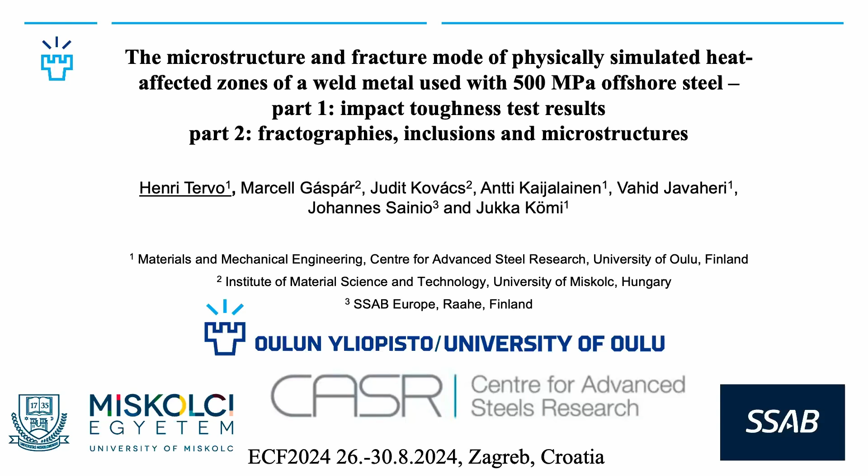So let's go. First, maybe there are some people who don't know where Oulu and our university are, so I would like to tell some basics. We have 8 different faculties. There are more than 13,000 students and almost 4,000 staff, a lot of alumni. It is one of the biggest universities in Finland. And we are located here in northern Finland. If you like flying, it doesn't take many hours to fly from anywhere in Europe. Currently, we have direct flights to Helsinki and to München, Germany. Or if you like slow traveling like me, then it takes longer.

Then our unit, Materials and Mechanical Engineering, is part of a steel research community called the Center for Advanced Steel Research, abbreviated as CASR. And in CASR, there are other units from our own university, but also from other Finnish universities. And altogether, this community is the most important unit in Finland for steel research and steel education.

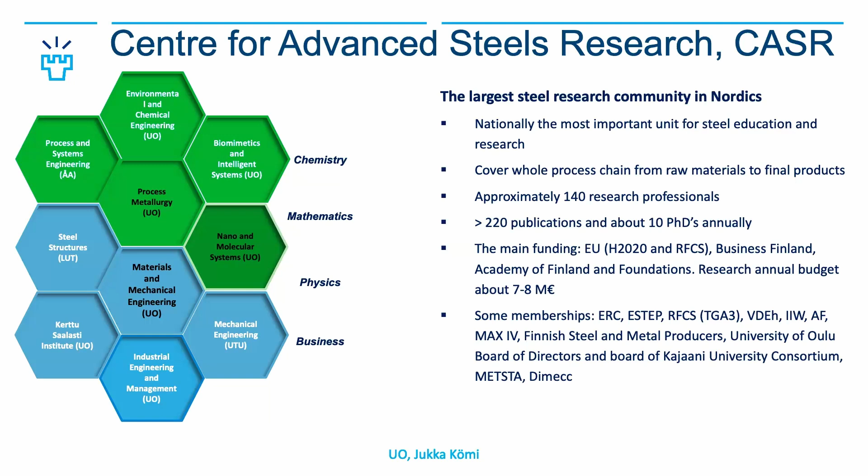Then we move on to today's topic. So the materials are high-strength offshore steels. They are developed for demanding conditions where both high strength and toughness are needed. And typical applications are offshore oil drilling platforms, wind power mills, or ships, for example.

And these base materials are engineered to have very good strength and toughness, but the weakest locations are generally the welded joints. That is because the thermal cycles caused by the welding alter the original microstructure, and that way also weaken the mechanical properties. And welding thick sections may require multiple welding passes. Then the thermal cycles affect not only the base material, but also the earlier welded filler material sections.

And there is quite a lot of research about the effect of heat-affected zones on base material, but not so much research about the effect on filler material. So that's why in this study we decided to study that.

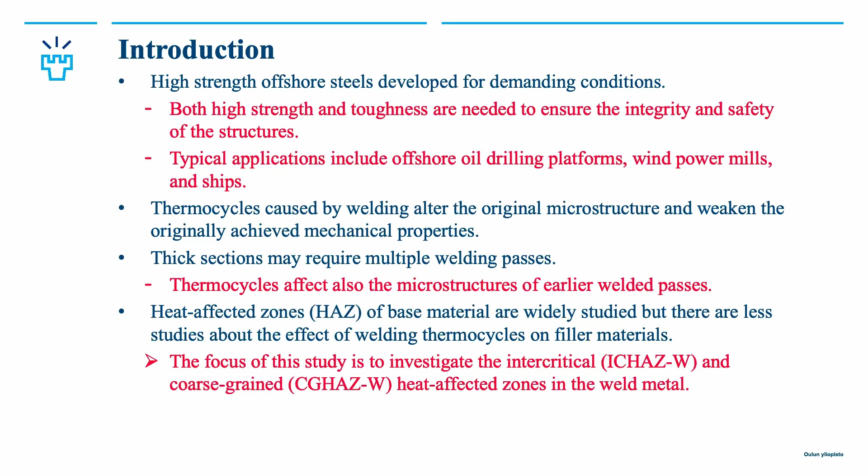And shortly about the materials, they were 16 millimeter thick 500 megapascal offshore steels. They were welded by the single pass submerged arc welding method, which is generally used with this type of steel. And the filler material was ESAB's filler material. Here you can see the chemical composition of both base material and filler material, and also the AC1 and AC3 temperatures calculated by JMatPro based on these chemical compositions.

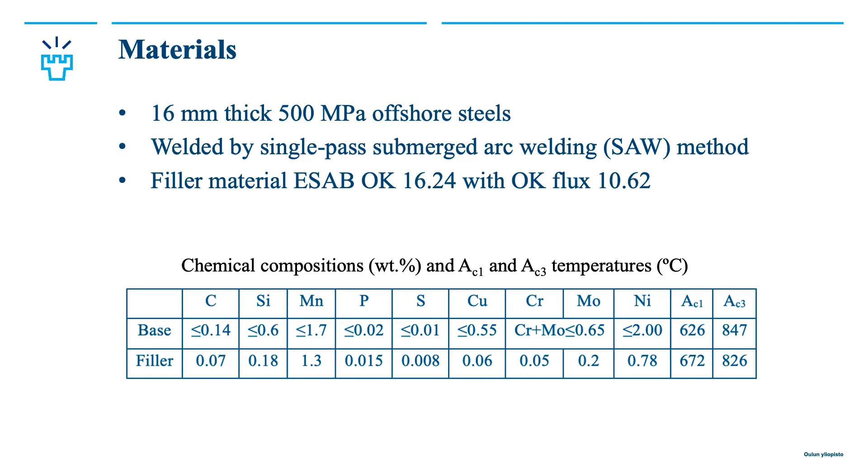And methods. On this single pass weld, we simulated heat affected zones by Gleeble, and then we measured impact toughness by instrumented Charpy V-notch test. Hardness measurements were done also, and then we did microstructural characterization, fractography studies and inclusion scans by FESEM. And for inclusion classification, we used our own Karakterizer tool that was developed by my colleagues at the University of Oulu.

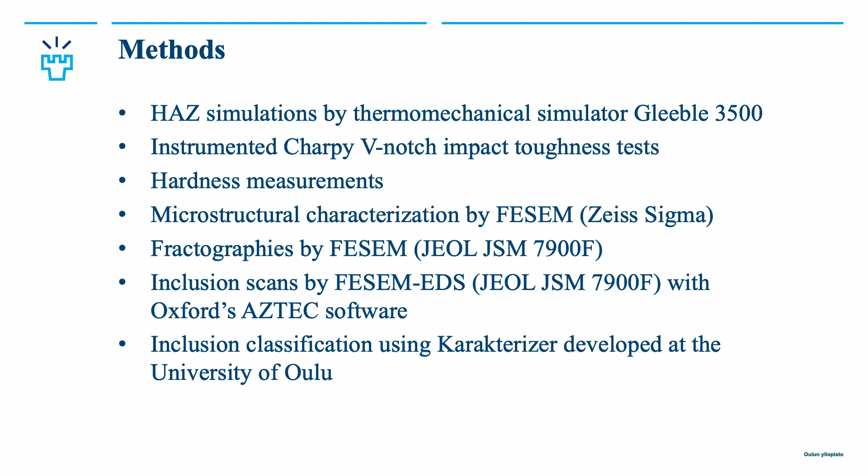And for the thermal cycles that were simulated, we had two different heat affected zones: coarse-grained heat affected zone and intercritical heat affected zone. The peak temperature here was 1350, which means that the steel is fully austenitized at this temperature. While in the intercritical heat affected zone, the peak temperature was 815, which is between AC1 and AC3 temperatures, so it is partly austenitized. And we used three different cooling times, which represent the typical cooling times used in welding this type of steel.

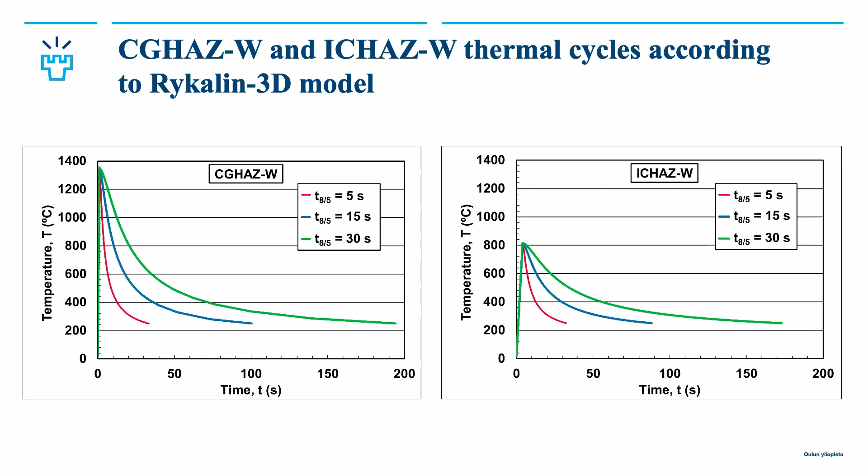Then about the impact toughness results. The original weld impact toughness is here, and you can see that in the coarse-grained heat affected zone there is not much variation. It is a bit less, and with the shortest cooling time there is a lower impact toughness than with the longer cooling time. But the lowest impact toughness was seen in the intercritical heat affected zone, and the trend was that it went down when the cooling time

was increased. But still, even in this case with the lowest impact toughness, it easily exceeds the requirement according to the standard, which is 20 joules at minus 40 degrees. And here we are at more than 100. So still relatively good impact toughness anyway.

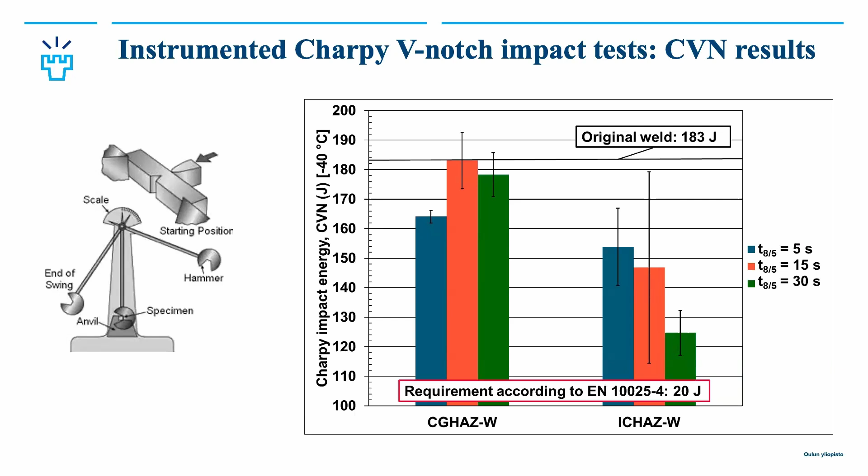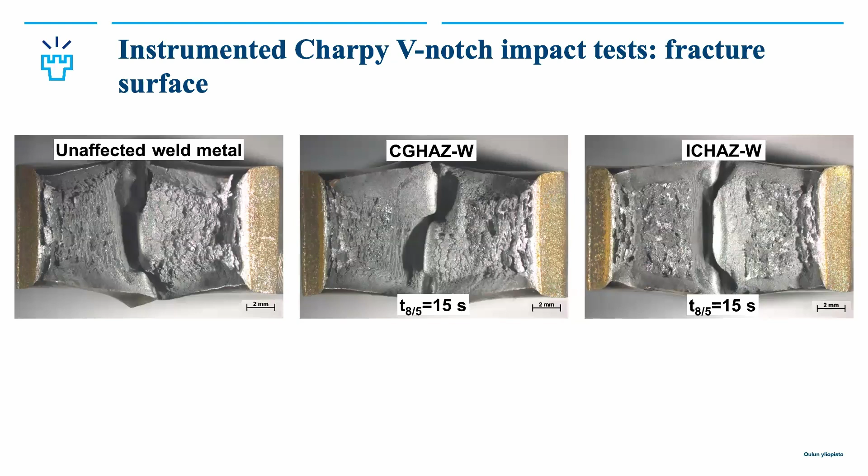And then with this instrumented Charpy V, in addition to the absorbed energy, we also see other data. We can have force displacement diagrams, and the fraction of energy that went into initiation of the crack and into propagation of the crack. From these graphs we can read the failure mode, whether it's completely ductile or partly ductile. For example, the unaffected weld metal looks very ductile, so it is similar to this. While in the intercritical heat affected zone, we see some unstable crack propagation here.

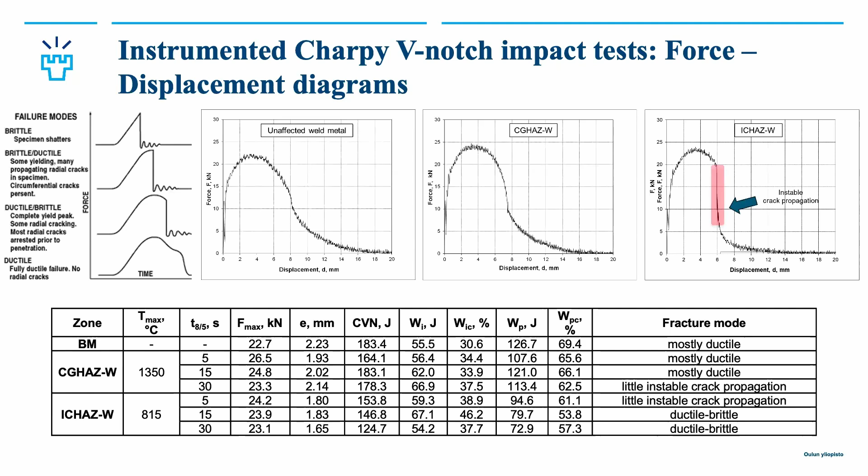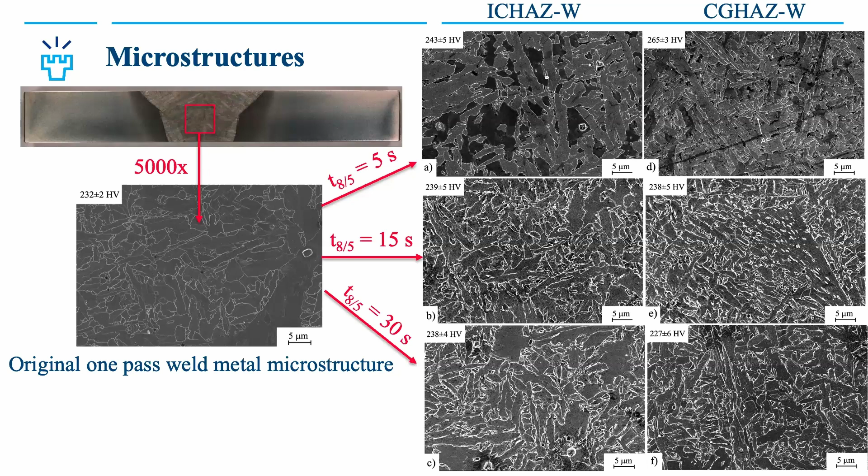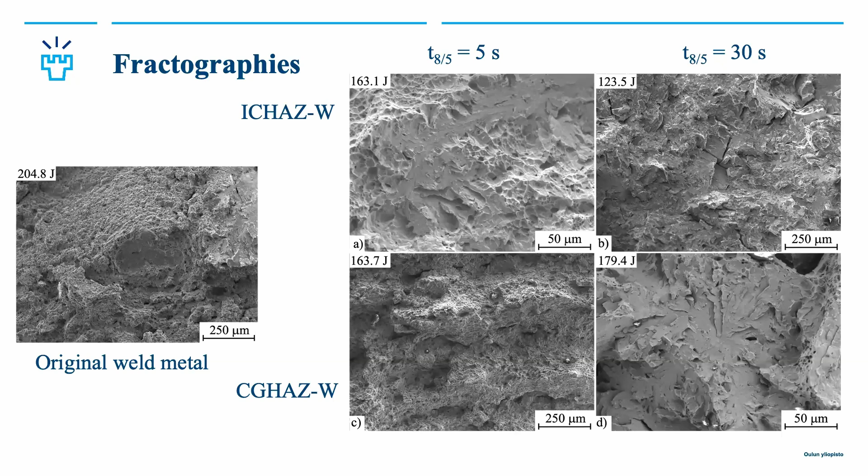Because here in... is it? Oh, it stopped working. Okay, but yeah, this laser doesn't work anymore.